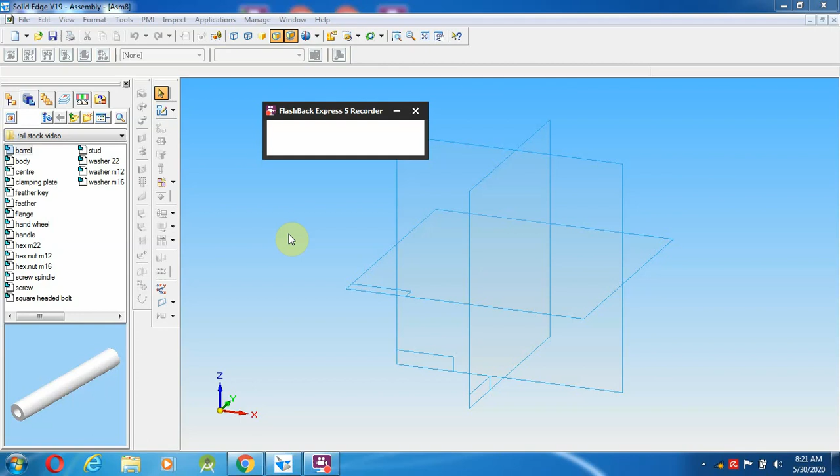So good afternoon everyone. In this video we are going to discuss assembly. Initially, some small things I have not done in the previous component - the 6 hole I have not made, so we have to do that first.

After that, in the barrel, the keyway cutting of 4.5 into 3 we have to make up to a length of 245, because 265 minus 20 gives us 245. So up to that we have to create it, then we go for the assembling.

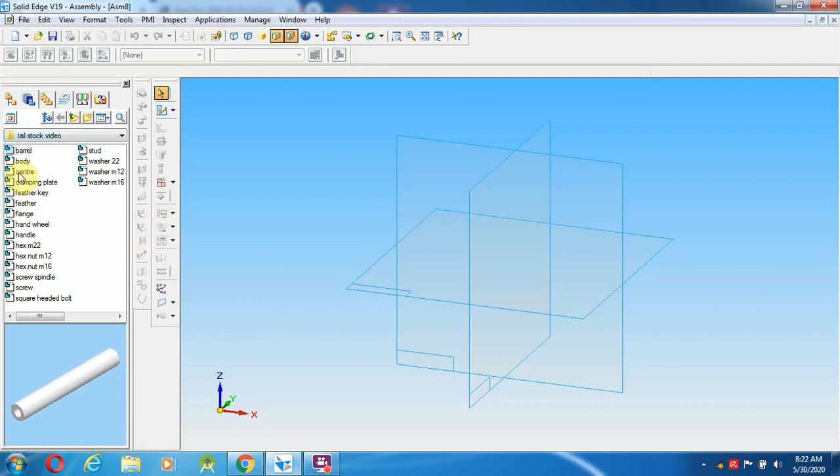In the assembling, I am not bringing the body part first. Why? Because in the barrel, at the bottom it has keyway cuttings, and how it has to be fixed over in the body part is very difficult to keep over here.

So first I am going to sub-assemble the feather as well as barrel. Go to the assemble option.

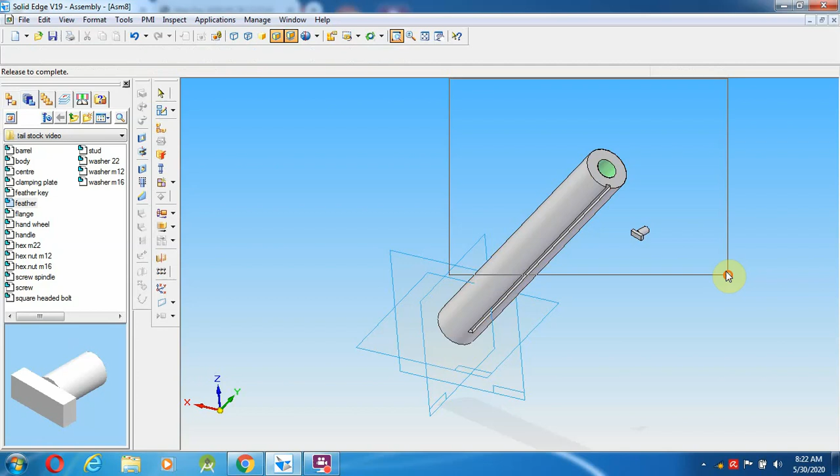Zoom in, then select the particular surface and top of the feather. Since this has to be met with that - no, it is not in this direction, it comes in the opposite direction, so we have to fix that with the help of flip.

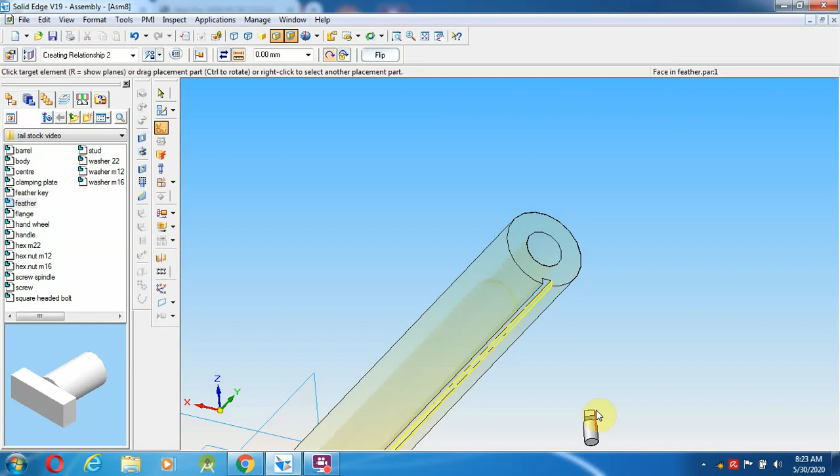Then go to the side - this as well as the side of the top of the feather we have to select. So now it has to be fixed over here. After fixing this, again select assemble once again.

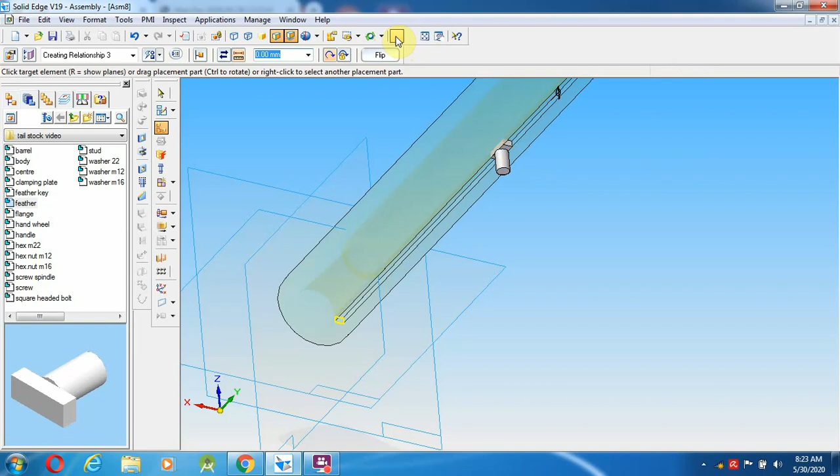So in the particular surface inside the keyway cutting I selected. After that, the front portion of the keyway, the front portion of the feather I want to select. So this is the position, give fit.

This will have a certain distance, so I am going to give the distance as some 20 mm. Why? Because it is the movable one - along with the feather it is movable, so that I have done.

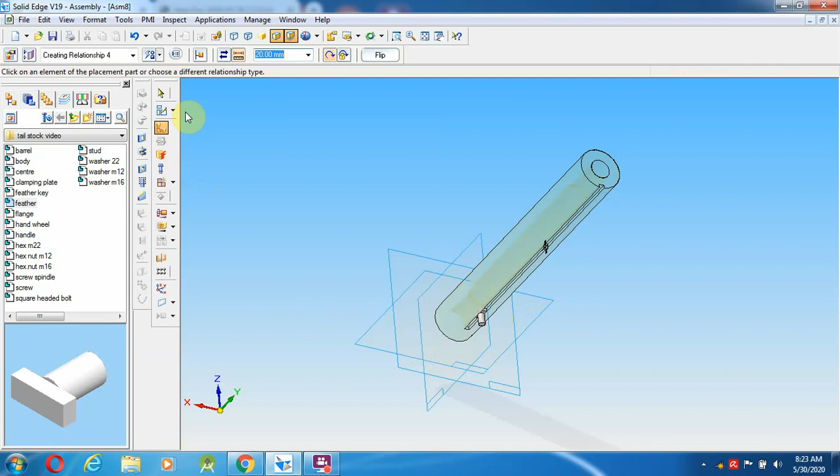Now I can go and bring the body part, so it will be easy to arrange it. Select assemble - this one has to go with this particular hole.

Go over here, rotate, fit. So in the particular hole it has to be fixed over here. Just to confirm, flip.

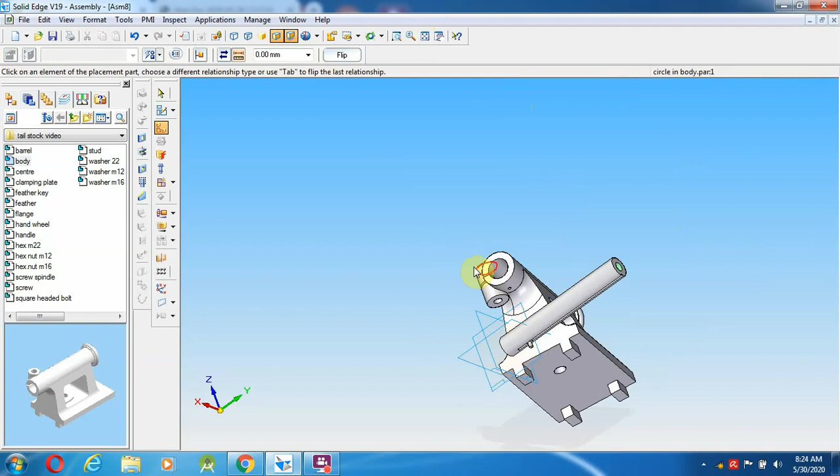After that, in this one the axial alignment, this also we have to make in the opposite direction, so exactly it has to be fixed over here. After fixing this, since it is a movable one, wherever you want you can keep it over here.

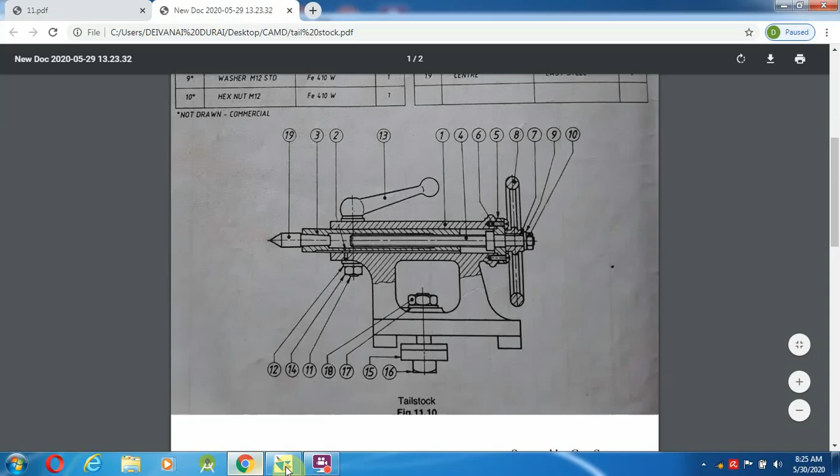So then finally the next step - I'm going to bring the 19th center, which has to be fixed in this barrel. So where is the center? I'm going to bring the center.

Select assemble, so it comes in the tapered one.

Or otherwise, first I am going to select assemble for this particular surface as well as this one here. It comes in the opposite direction, so I am going to give flip.

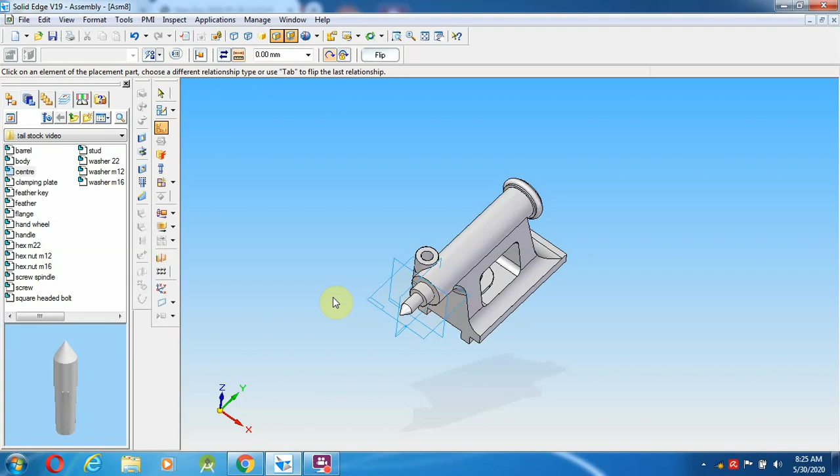So finally I am going to make the assemble over here, and give the axial alignment. The initial steps are over, then rotate - there is an option called rotate.

After rotating, I am going to bring the next part while using the assembly - first part, second part, third part, and 19th part. So this has to be assembled over here.

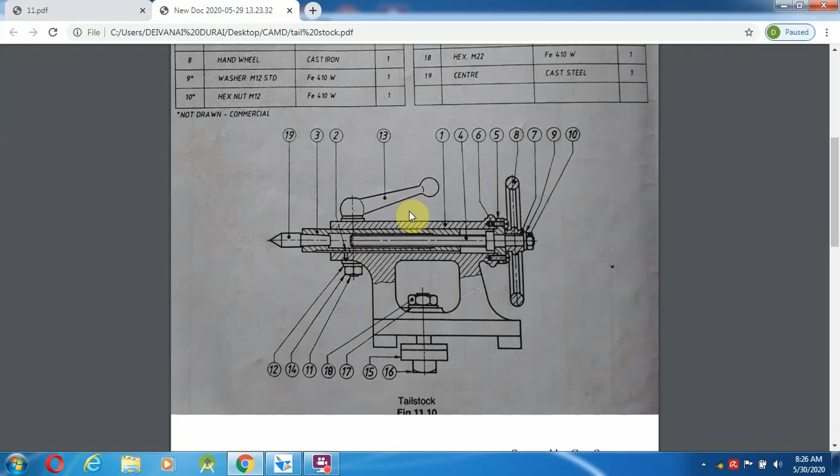Now I am going to bring the 13th part - that is the handle. I am going to bring it, go over here, select handle. So the handle I am going to keep over on top of this one, on the bottom surface.

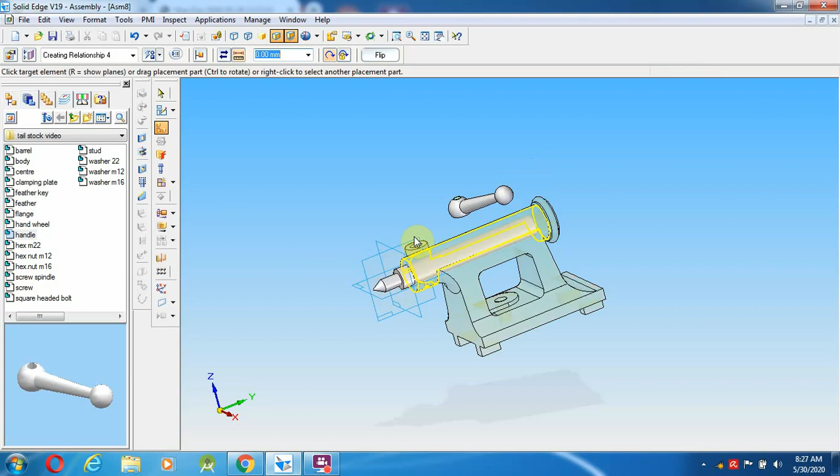Assemble. After assembling this, then we will bring the 12th, 14th, and 11th components we can assemble.

According to that, the 11th is the stud. Go over here, select the stud - that is the stud, we see the component. The stud we are going to make arrangement over here.

Select assemble, stud, select assemble - so we will see the diameter of the stud.

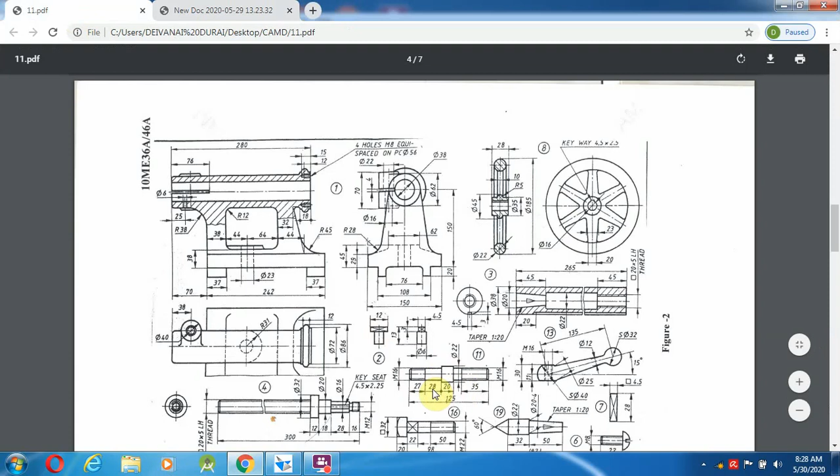So that stud - what is the component? Stud is the 11th component. Where is the 11th component? It's here. One end is M16, another end also M16, 20 mm. So this we are going to keep over here.

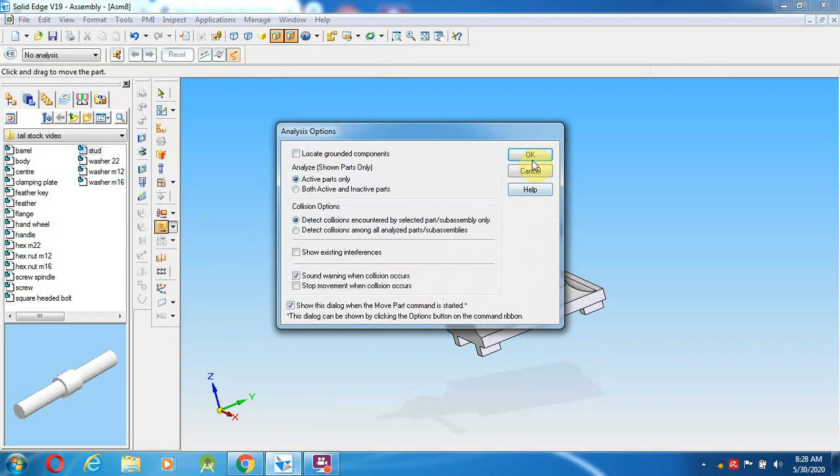Select the cylindrical part over here, just with the help of move part, this has to be moved over here. Exactly, you can fix it over here, then stop, then we will rotate this one.

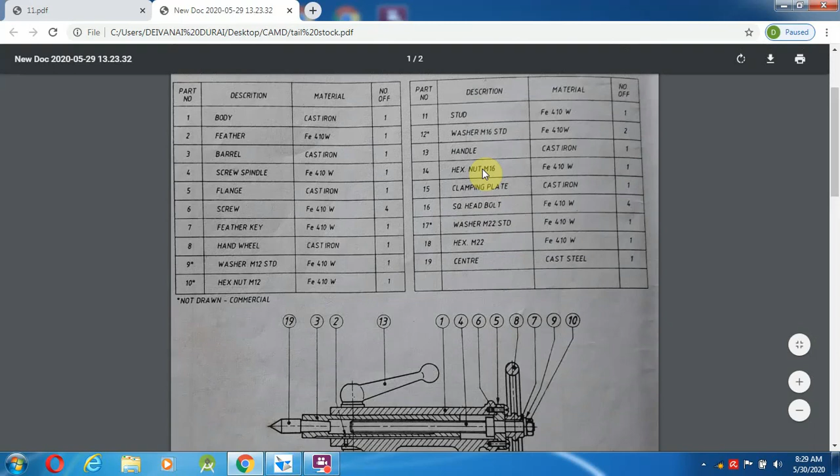Now I am going to select the 13th one - 11 stud, 12 washer, and 14 hex nut. So what is the washer M16 and hex nut M16, because this will be the 12th and 14th.

So hex M16 - both things we have to bring over here. Hex nut M16 as well as washer M16. So now first I am going to fix the washer.

In this surface, this has to be met, and axial alignment we can give. Now can give flip, so that means it has gone inside. While selecting this particular surface, we will be very careful, so as much as possible, we can bring it over inside. Select assemble.

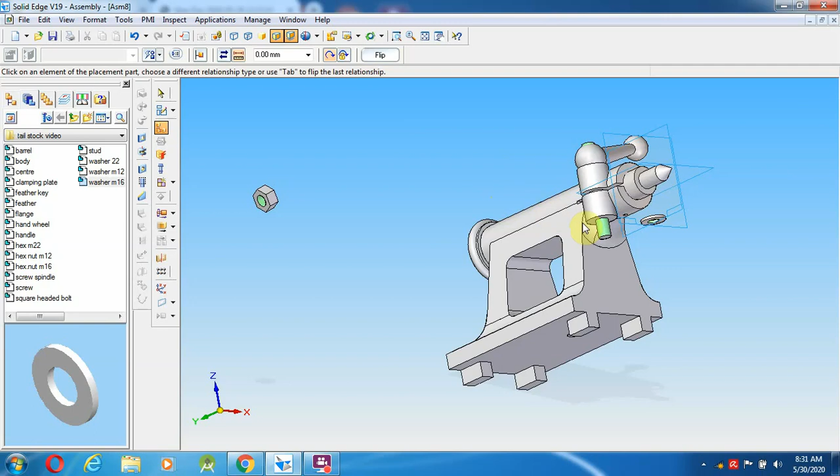Try to give it a flip, it will become down, I think. So now this as well as inside, it has to be assembled.

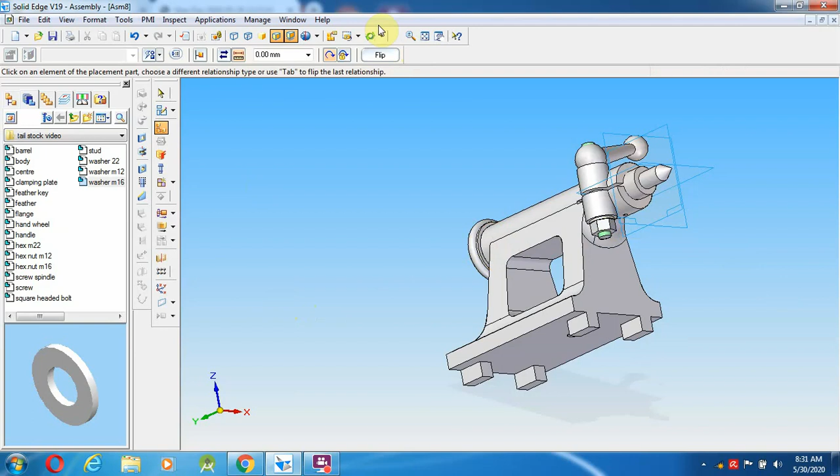Same like the other M16 also. In this surface, I'm trying to make the flip, so it will go downward. You can select this, and the axial alignment of this and this one, so this also gets assembled. Almost in the front, somewhat assembled.

After assembling, what is the next part? So 11, 12, 14, as well as 1, 2, 3, 19 we have assembled, even 13th also assembled. Then we can go to 17th and 18th, 15th, okay, and 16th. First we are going to make the 16th one, then 15th.

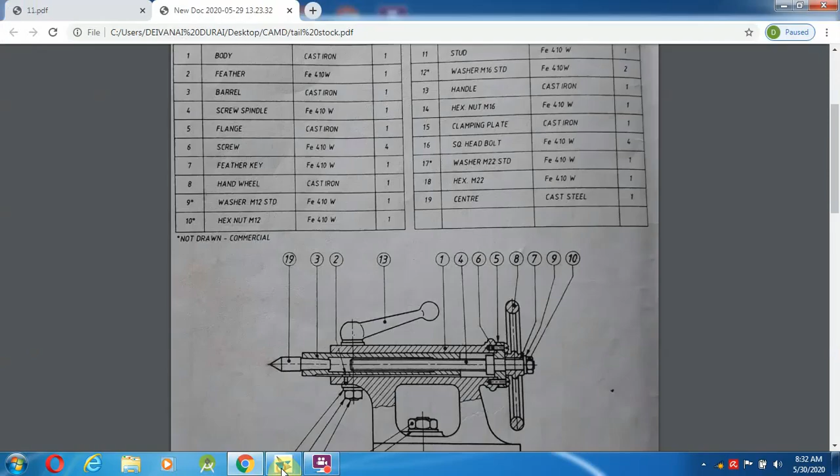16th is the square head bolt, so go over here, which is the square head bolt. This one will be the square head bolt, and 16th is square head bolt, 15th is the clamping plate.

In that clamping plate, 17 and 18 have to be attached over here. So where is the clamping plate? First, initially bring the clamping plate. On the clamping plate we are going to fix over here.

So assemble this as well as this one, and this as well as the bottom surface. So the clamping plate has been assembled.

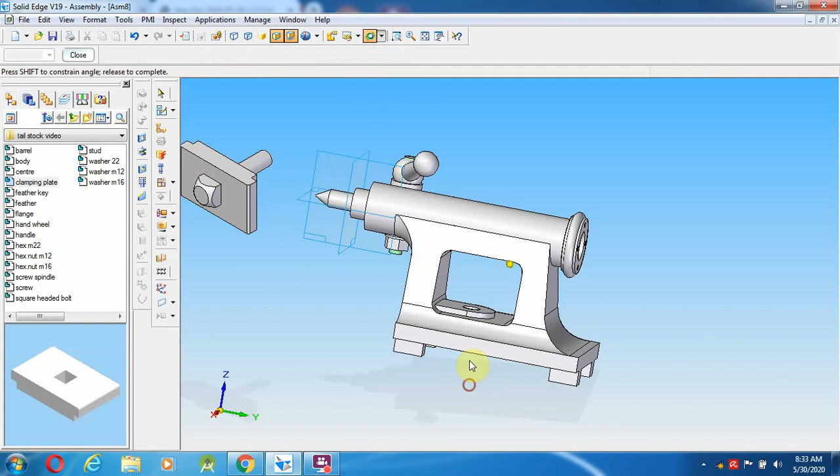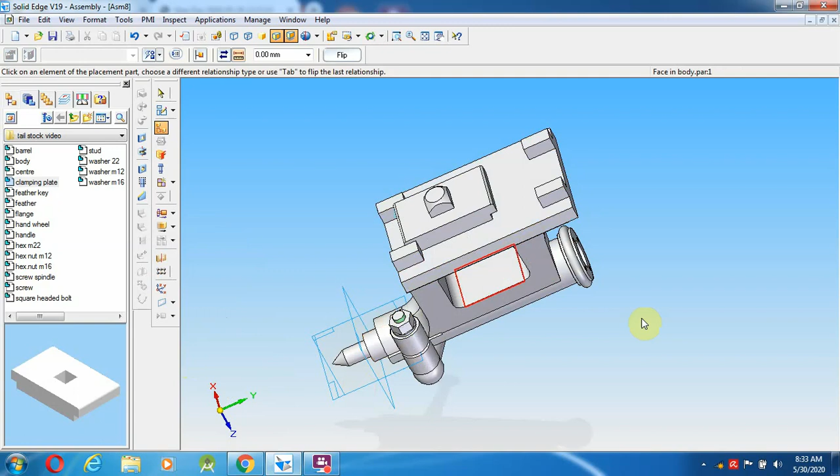Now this sub assembly I am going to bring over nearby the component, and rotate this as well as this. So this has to be done over here. So like this, the surface alignment you have to give.

After giving this, I am going to make the next one, what is that, 17th and 18th. So almost it is the washer, 17th and 18th is the washer M22, hexagonal M22. Go over here, washer 22, hexagonal M22.

Select assembly, this as well as the washer. Try to give flip, it will go down. So the original you can keep, this one as well as the middle.

Then again select the assemble. So already it is there. The top of this, the screw has to come over here. Then axial alignment, even this here you can fix over here. So the component has to be saved over here.

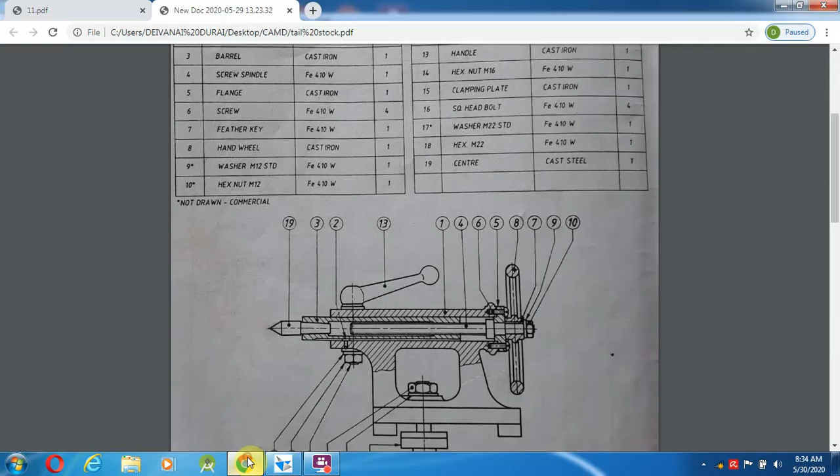Almost the front portions, what are the things we have done, then comes into the other thing. So the fourth component, what is the fourth one? It is the screw spindle. The screw spindle we are going to bring.

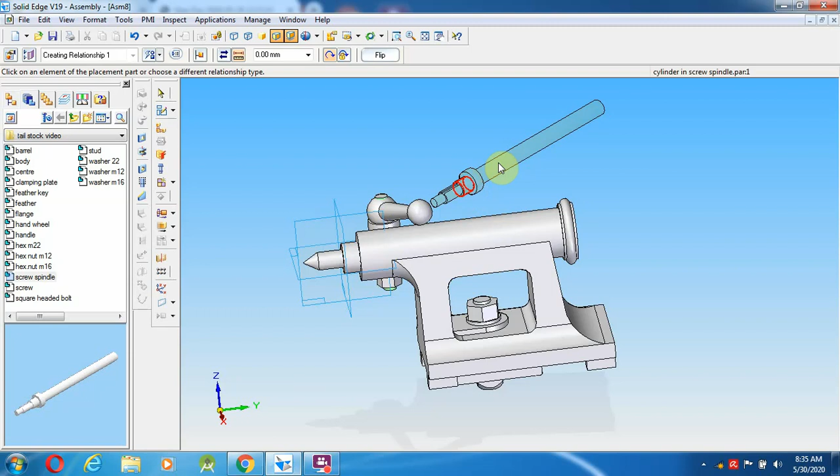Go over here, select screw spindle, select screw spindle, bring over here. Now this screw spindle, which way will it become over here? The lengthier part it comes this side. So that means this threaded portion will become inside.

And try to keep the wireframe model. Why? Because of getting this edge, because you see that has to be fixed over here, okay. So that edge is required. So go, select assemble, even the inside one.

Assemble, otherwise solid part we try it. So now you can go and select the assemble.

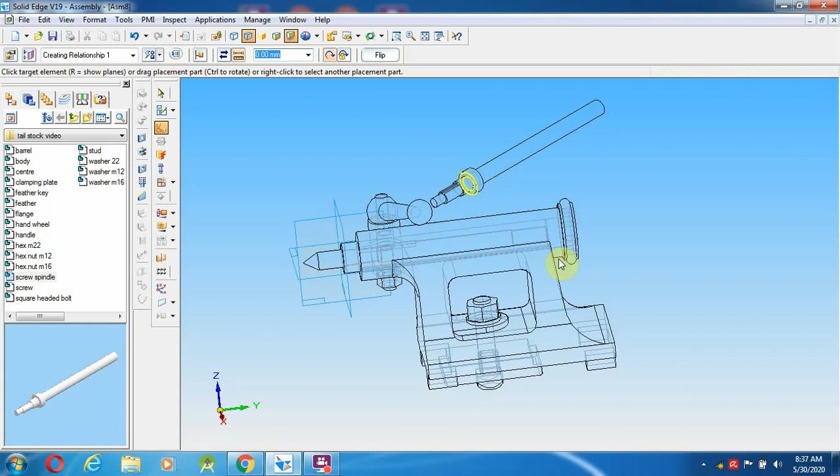So this particular surface has to be fixed with, so select this surface has to be fixed with this one. It comes into the opposite direction. I made it the opposite direction, and also we have to select this particular thing into this one. So it has to be arranged.

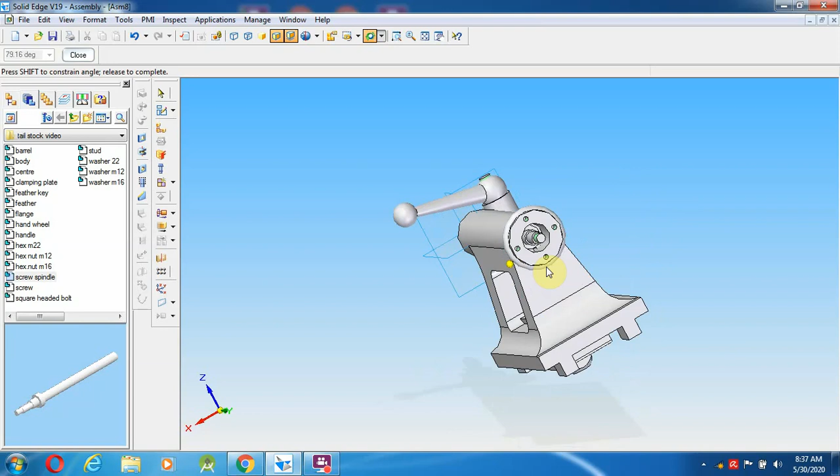So try to see how this thing has to be arranged over here. Exactly it will be fixed over there. Okay, so now after arranging this thing, now you can go and check it.

So exactly it will be arranged. Okay, now what things will it go inside, that is the fifth one. So what is the fifth one? That is the flange. Go and bring the flange over here.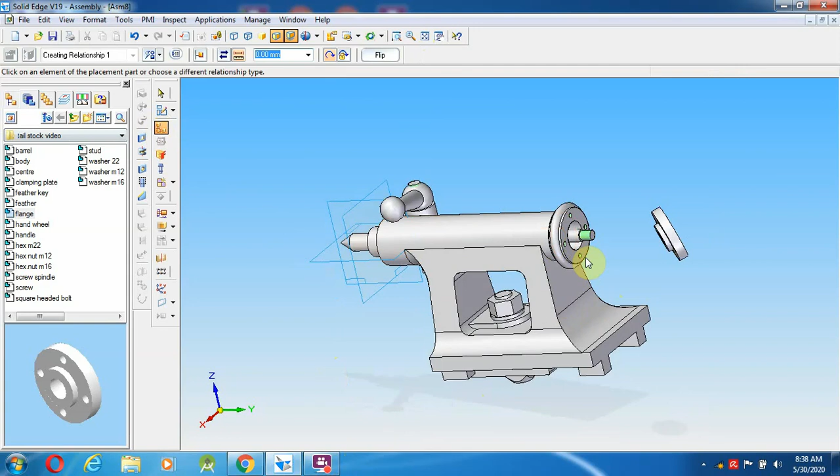So where is the flange? Flange, bring it. So this flange I am going to select the particular surface over here. Select assemble, this as well as the particular surface.

Okay, so before arranging this, do one thing. First, axial alignment of the screws you can give. Okay, rotate this screw as well as any one of the screw you can give.

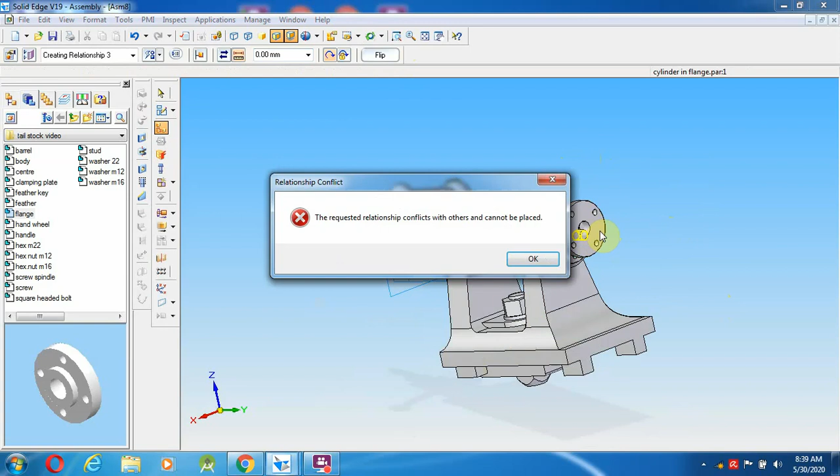Now you can select the surface, this one, back side of this as well as the middle. Okay, or otherwise, sometimes it's not aligned. So go over here. First this as well as the middle.

Delete the component. Suppose it's not coming for 2 to 3 times, please delete and again retrieve the component over here. That is the better thing. The surface as well as here, click and assemble.

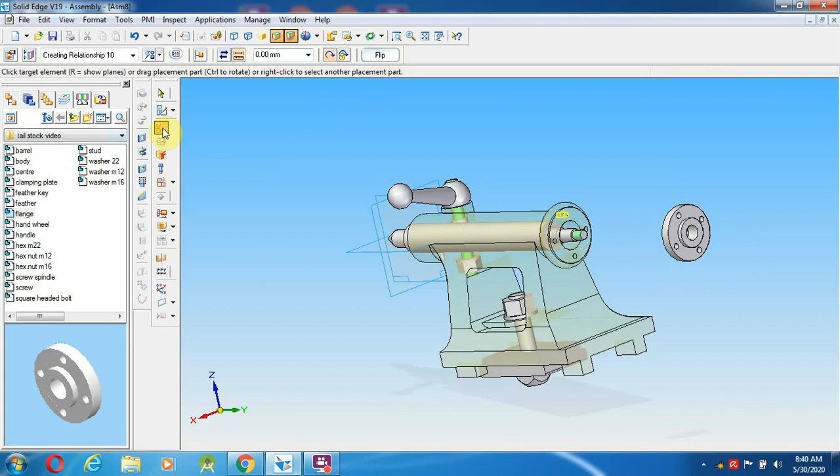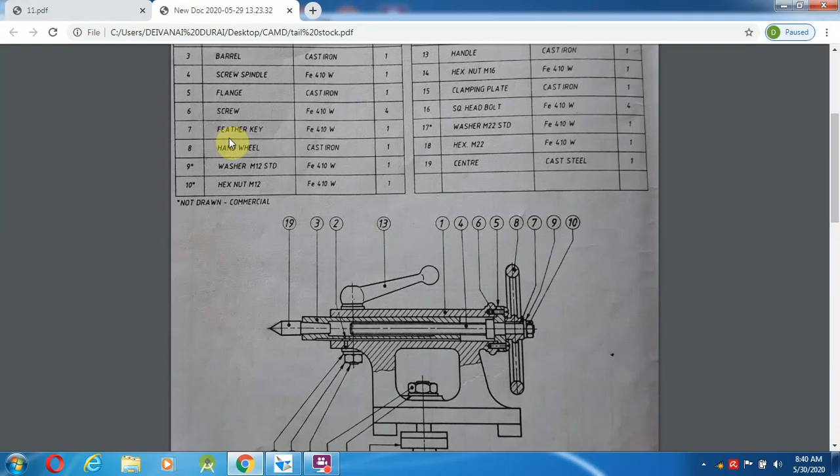Now go assemble the back side component. It has to be assembled over here. Once that's assembled, we select the next component - after the fifth and sixth component is the screw, and the seventh one is the feather key.

So the seventh one is the feather key. I am going to keep the feather key in this cap. First I am going to place the feather key. Where is the feather key? This is the feather key - sorry, delete, that's not the feather key.

The feather key - where exactly we need to fix it - above the threaded portion, the feather key we are going to keep over here. Select this as well as the inside surface, and we move according to that. We are going to fix the feather key, just move the part and keep it in between those things, the feather key.

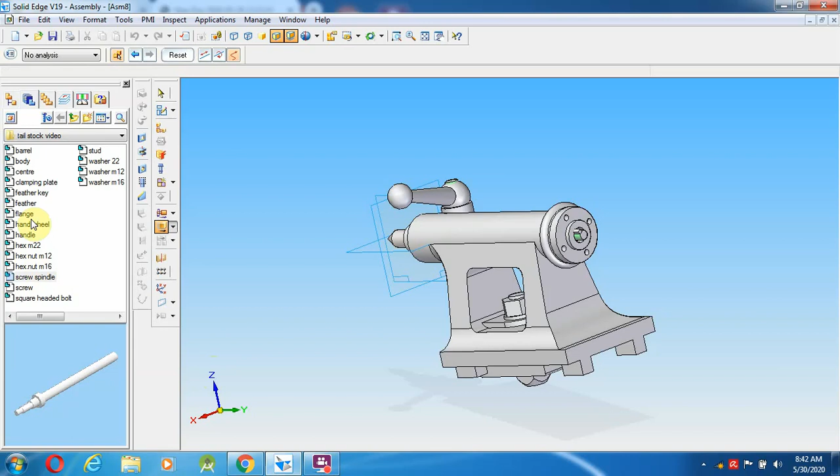Go over here, wheel, hand wheel - so this is the thing. Select assemble. This particular surface has to be placed above this.

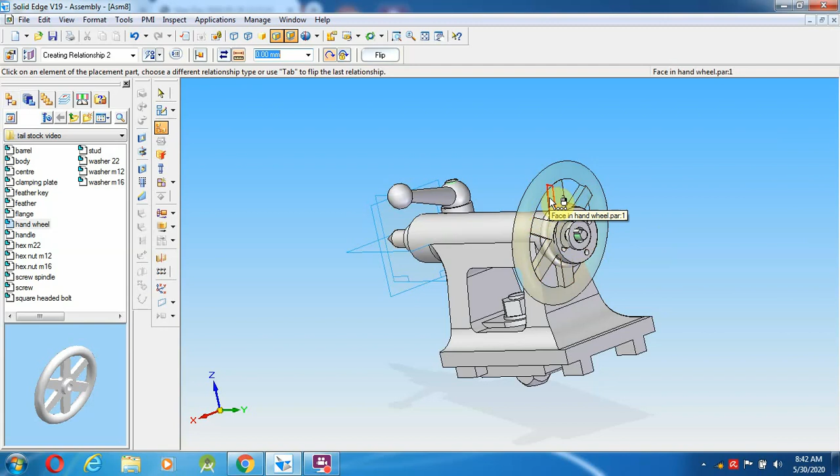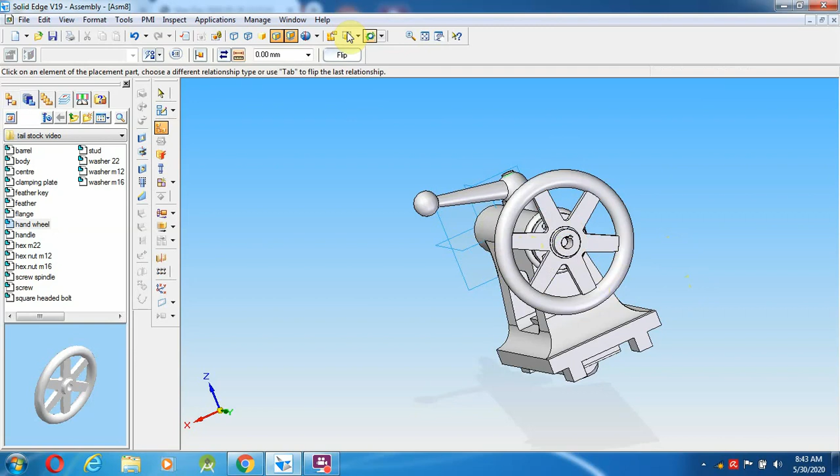Rotate if you're not getting a clear view. From this I am going to place over this one, then do the axial alignment over here. Going to try to rotate so it gets fixed properly.

Once after assembling this, you can keep the feather key over here. It's good, so then you can come into the next portion - what is the next thing? The 8th and 7th are already kept, now the 9th and 10th.

The 9th and 10th are the Fe 410 W, and M12 hexagonal nut, along with the M12 hexagonal nut and washer M12.

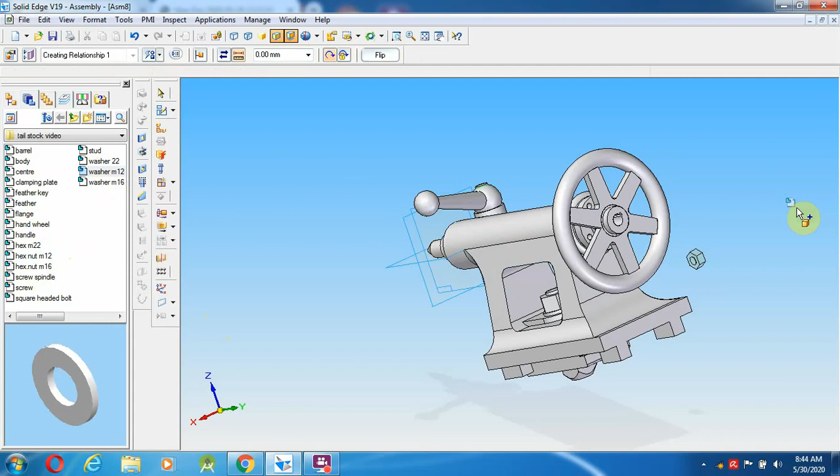Select the surface, flip, flip, and first the hexagonal nut, then select this as well as this, and flip, flip - that's it. So the wheel handle is assembled over here.

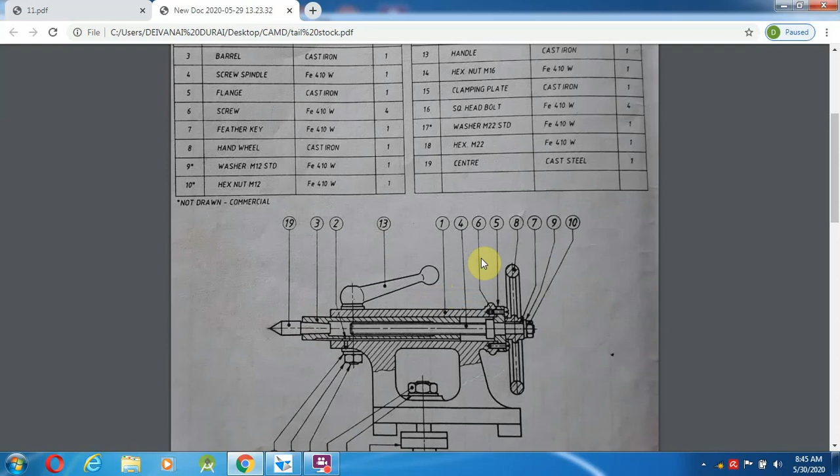Then what else is left out? 1 and 4 are already assembled, and 6 is the screw. We thought of assembling the screw before, but anyhow we will assemble it now. Go and select the screw, select assemble.

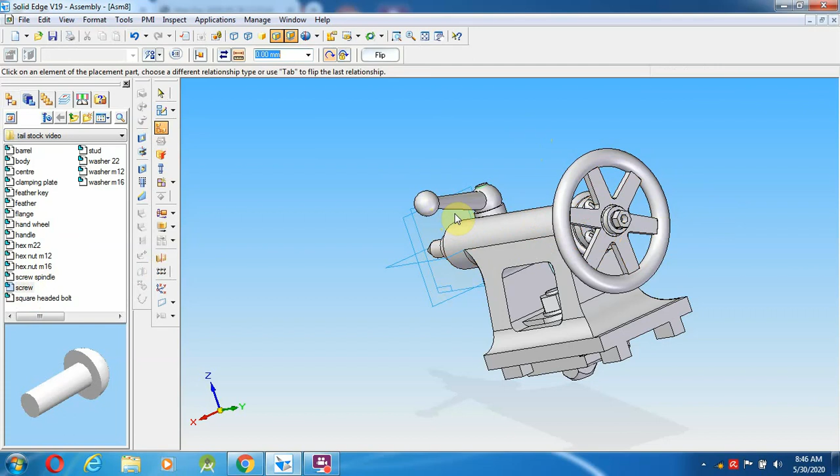Place it inside the hole - this is the thing. Now move to the other screws. Select a screw, Control Z, select the screw, assemble it - screw as well as here on top. The second screw has to be assembled over here. Similarly on the other side we have to assemble the screw.

Select the screw - before placing the handle, we are assembling the screw, that is best. Select this and flip, and select one more screw, select, fit, flip. So almost it's assembled, so we can leave it here.

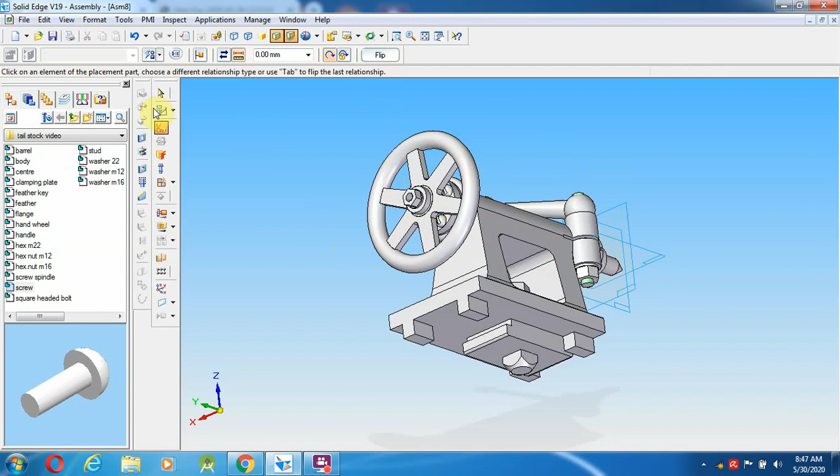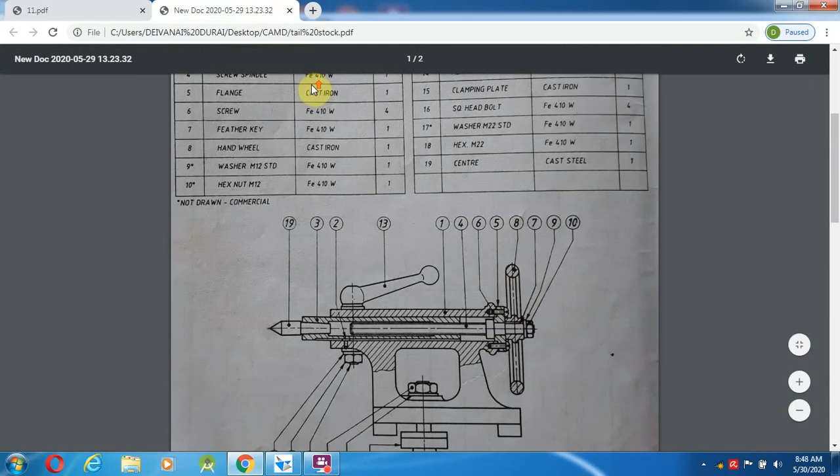After assembling this, I will try to rotate it, and after rotating I am going to check what other components are not done. So almost 7th, 8th, yeah 5th - the body is arranged, feather arranged, barrel arranged, screw, spindle, flange, fifth part, fifth flange.

The flange is also assembled, and the screw just now arranged, feather key starting, hand wheel arranged, washer M12, hex nut M12 arranged, stud - what is the stud?

The stud is also arranged. Then comes the washer M16 and hexagonal nut arranged, handle assembled, and the clamping plate - it comes in the bottom, and the square head bolt, along with washer, hexagonal nut and center. So all the components have to be arranged over here.

Once you've completed this, go and save it as a draw assembly diagram - give save. After saving, go to create drawing, okay.

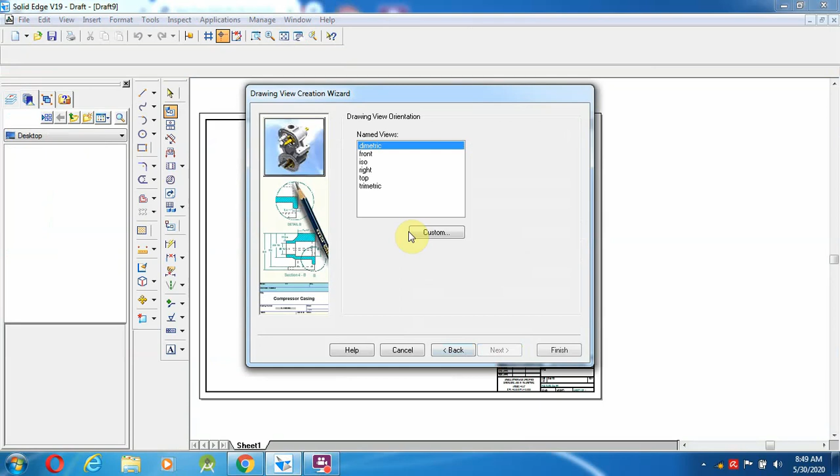Next, front - just check the front view, how it will look. The front view is coming like this, but it's not the correct front view, so we have to rotate - align edge, I'm going to rotate towards the front view.

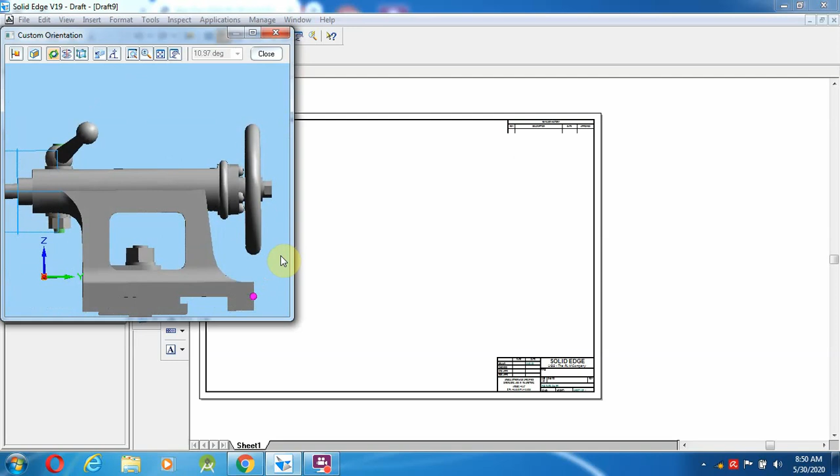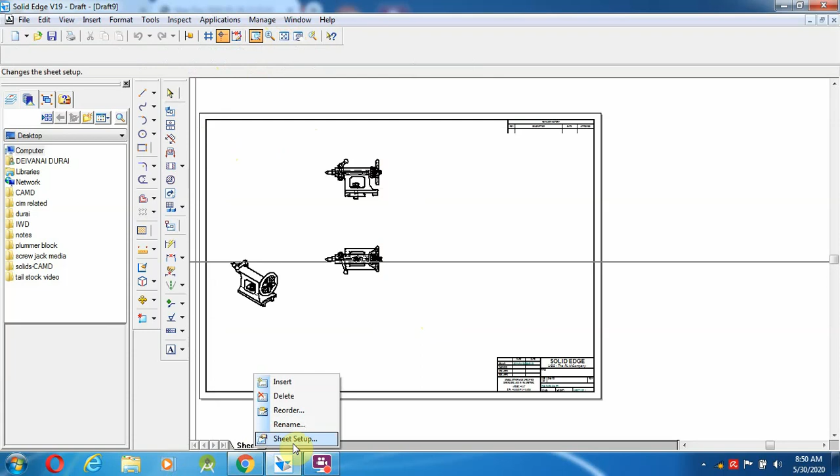Almost this is the front view, and top and dimetric. Finish, going to keep it over here, okay. Wherever you require the section, you have to make the sectioning over here. So go and change the sheet setup.

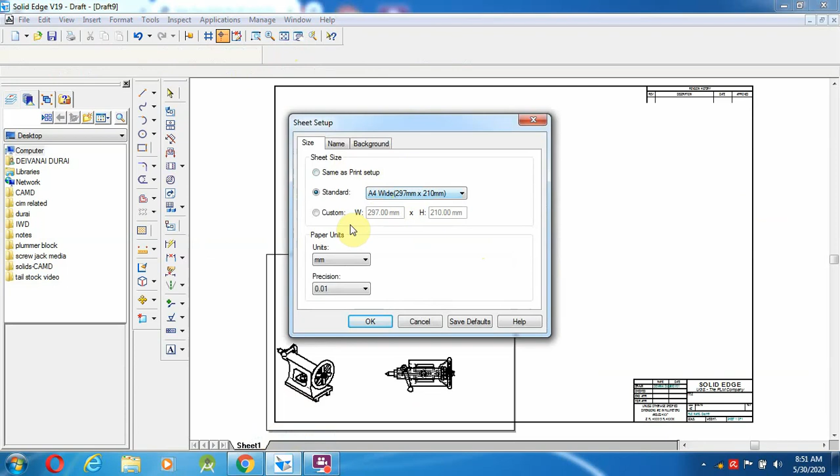A4 with 297, give okay. So move everything and keep it inside the one, and give fit. I think one more sheet is created, so better - now save, go here, again create drawing, give OK.

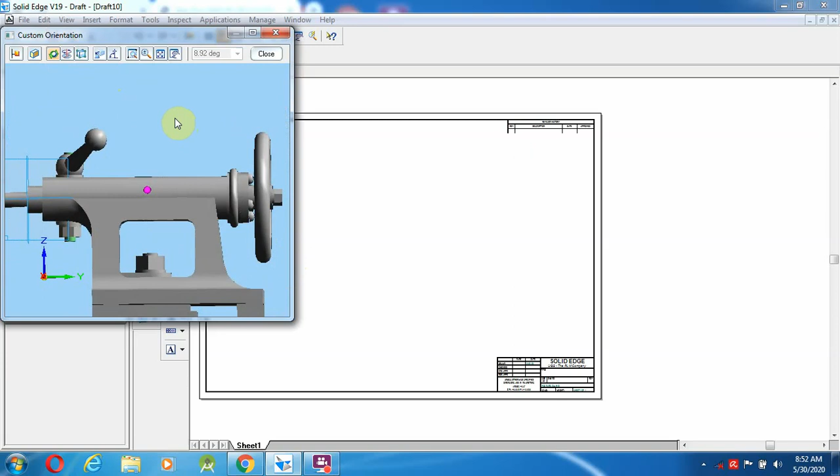Next, front custom - trying to rotate, slowly you can rotate, until you get the front view, top, and finish.

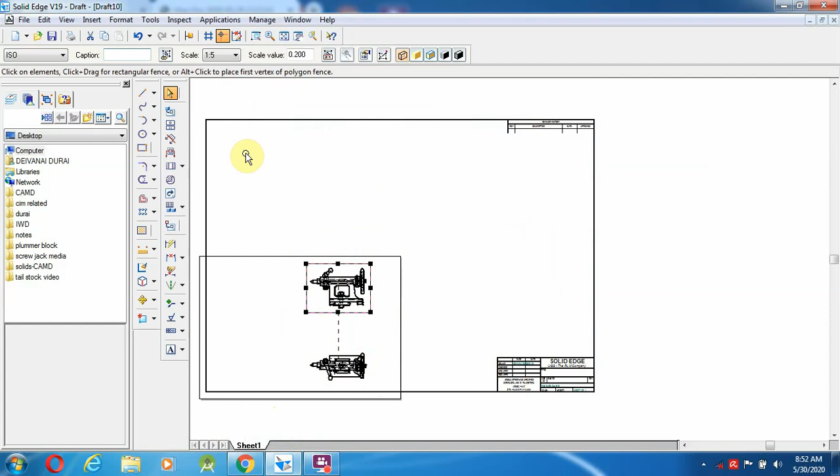Dimetric also has to be added. Go to your sheet setup, A4 size, give OK. This component has to come and be placed inside the sheet. Like this you have to make this one. Due to the software problem, this original sheet has to be placed over here.

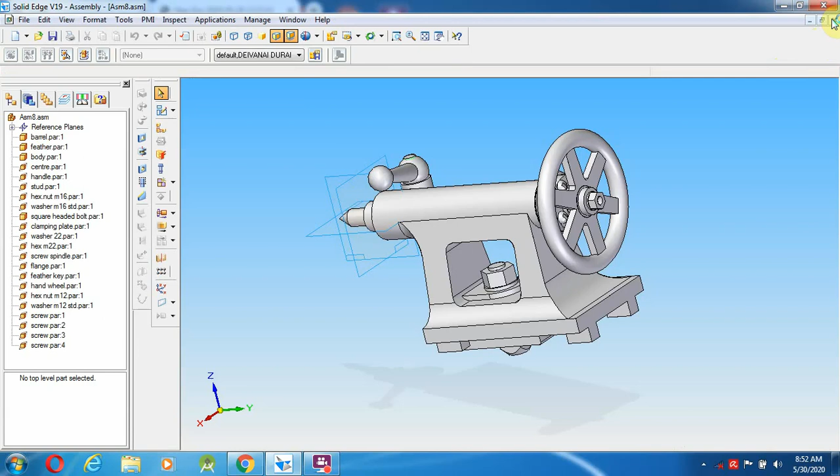So this I am going to save as the Tailstock video. Save. Close and complete - it will take around half an hour.